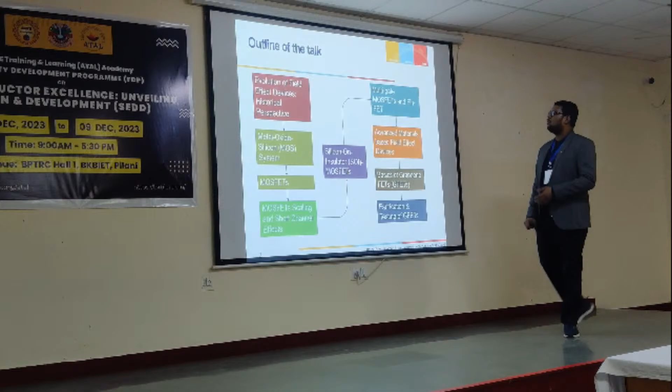So here is the outline of this talk, prepared in this way. First is the brief historical perspective of the evolution of field effect devices, exactly where we are - we will discuss this first.

Then I will discuss the basic things, that is the simple MOS system or metal oxide silicon system, because I think you have enough idea about that, but to continue the whole thing, a few selective portions should be important to discuss at the beginning. So metal oxide system, silicon system, MOS system we will discuss, and in continuation, very briefly, only the important portions of the MOSFET we will discuss here.

Then we will move to our most important portion, that is MOSFET scaling and short channel effects. We will try to see exactly what problems we are facing due to the miniaturization of the device - specifically, the short channel effects. We will discuss that because that is the motivation for researchers to choose some new materials, new devices.

So from here, the turning towards new devices is basically multi-gate MOSFETs, and one of the ultimate solutions is the FinFET. But before going to that, we will discuss one very important topic called the SOI MOSFET, silicon on insulator. That is kind of a linkage between these conventional MOSFETs and the multi-gate devices.

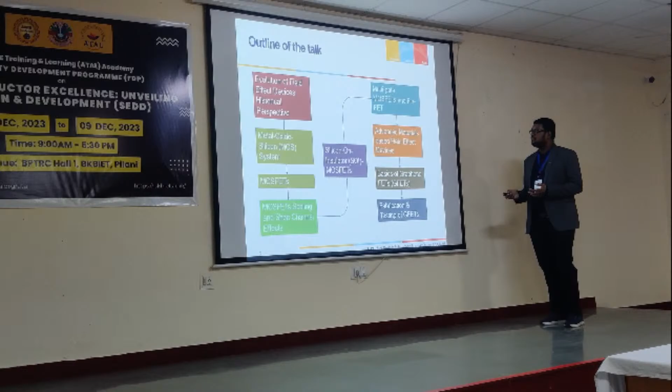In recent times, we are moving towards different advanced materials. We are exploring materials like CNT, carbon nanotubes, and graphene, these are popular advanced materials. People are trying to develop devices using these channel materials like CNT and graphene. They are also working with other advanced materials like chalcogenides, 2D materials, MXenes, black phosphorus, hexagonal boron nitride, so many new materials are being used as channel materials to develop new field effect devices.

But not necessarily all those devices are comparable to conventional silicon technology. These are advanced research areas, and exactly in that domain we are working. I will give you some idea of exactly what we are doing and how we are trying to move towards some new kind of field effect device. Not necessarily will it only be used in mainstream electronics, it can be used for other applications also. So in that way we will move. This is our full outline and flow of talk, and in that way we will proceed.

So we can start discussion on historical perspective.

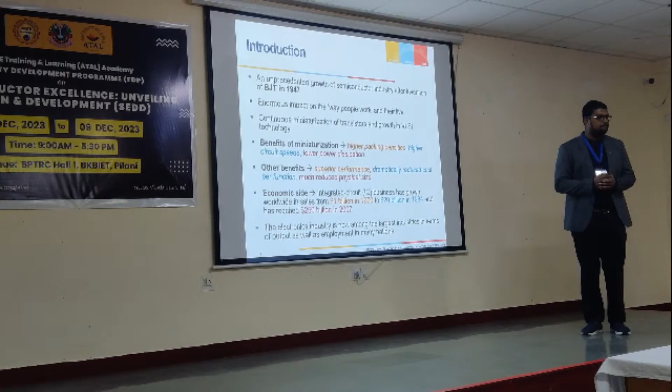1947 is an important time because BJT, the bipolar junction transistor, was invented then. After its invention, there was an unprecedented growth of the semiconductor industry, and this invention created enough impact on the way people work and live. Then device dimensions were miniaturized continuously, and slowly we moved towards VLSI technology, very large scale integration technology.

What were the benefits of this miniaturization and moving towards VLSI? We obtained higher packaging density, higher circuit speeds, and lower power dissipation. These are all very important points from the integrated circuit perspective. Other than this, we have superior performance, dramatically reduced cost per function, and much reduced physical size. If we discuss all these in detail, you will see the huge change that happened in the electronics industry.

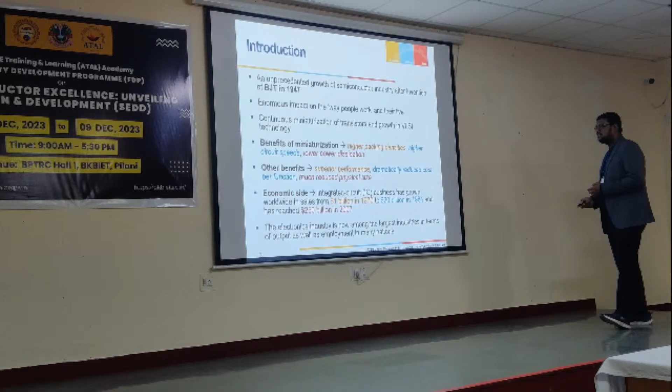If we think about the economic side, the integrated circuits business has grown worldwide in sales from $1 billion in 1970 to $20 billion in 1984, and reached around $250 billion in 2007. That is a huge economic growth in the integrated circuit market. The electronics industry is now among the largest industries in terms of output as well as employment in many nations.

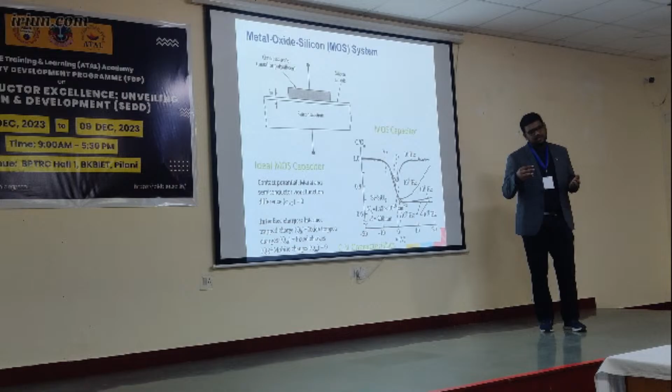The metal semiconductor junction and PN junctions are characterized with IV characteristics, current-voltage characteristics, because if we apply a voltage, current will start to flow through the junction, either in forward bias or reverse bias. But this MOS junction is not similar, because if we apply some voltage between the metal and semiconductor contact, no current will flow, since they are separated by the insulator. So simple IV characteristics is not sufficient to characterize this junction.

The earlier two junctions we can characterize with IV characteristics. In any interview we may be asked to draw the IV characteristics of a PN junction, or of an MS junction. But can we say IV characteristics of an MOS junction? How can we characterize it? We have to measure the capacitance-voltage measurement, the CV plot. Only then can we characterize this junction.

So here I have shown one CV characteristic to characterize this, because this structure is just a capacitive structure. You can assume this - this is the metal part, and this is the silicon substrate, which is also doped.

So these are the two parallel plates, and silicon dioxide is the insulating part inside there. So it's ultimately a capacitive structure, and to characterize it, we have to follow the CV characteristics.

Okay, this is the typical CV characteristics. I am not going to discuss that.

We can just think, when we will discuss the operation of this MOS capacitor or MOS junction under different voltages, because that will be considered as the field effect. So we will consider this MOS junction as the ideal junction.

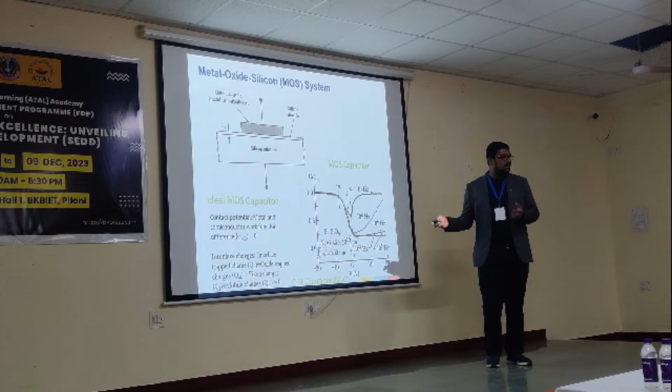What is the difference between ideal and non-ideal junction? When we consider this MOS junction or MOS capacitor as ideal, we will consider the contact potential. That means the work function difference between this metal and this semiconductor will be 0. There is no contact potential, that means no work function difference. That is the ideal situation. We will just assume it, and later we will just ignore it.

And the second assumption is the interface charges. Interface means the silicon dioxide interface. That particular interface has no interface charges. Really, we know there are 4 different types of charges: interface trap charges, oxide trap charges, fixed oxide charges, mobile charges, but we'll consider them 0 initially. And with these two assumptions, we have the ideal MOS capacitor.

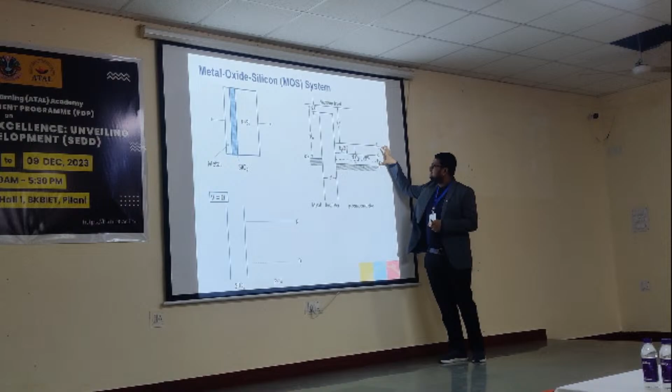Now, under these situations, what you can see is this semiconductor side, conduction band, valence band, they are flat. So we can say these are the flat band conditions, and under these situations, if we try to see the electron and hole concentrations of the semiconductor side, they can be represented with this straight line.

So suppose this is our... okay, sorry. Yeah, that's fine. So now, this is the typical energy band diagram.

So now here I'm just trying to show when the voltage is 0, that means the voltage between metal and semiconductor is exactly equal to 0. At that condition, if the MOS junction is ideal, the hole and electron concentration are constant from this interface towards the bulk region. Okay, that simple thing we have considered.

Why have we considered the hole as the top? Because this is the p-type substrate and Fermi level is close to the valence band. So holes are the majority carriers and electrons are the minority carriers.

Well, now we are applying the voltage between these two terminals. So V equal to 0 should not be applied here. So V less than 0, V greater than 0, V much greater than 0 - these three conditions we will see.

Here is the typical energy band diagram and here is the electron and hole concentration variations shown simultaneously. So here these are the accumulation conditions. What is accumulation? If we can apply a voltage which is less than 0, that means a negative voltage, applied at the metal side with respect to this semiconductor.

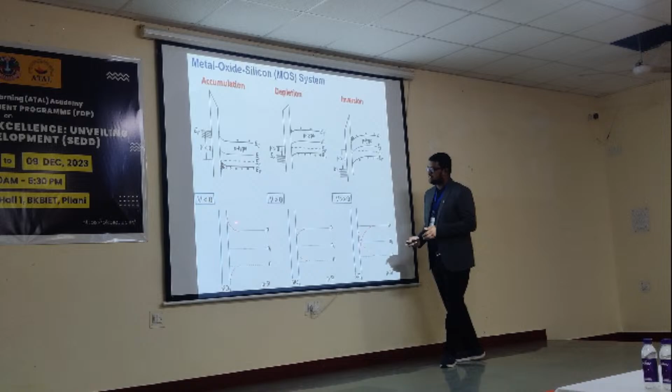So application of this negative voltage to the metal - what you can see is that hole concentration near this interface will increase. At the same time, the electron concentration will decrease in the same order. That happens due to the polarity of the charges, because we are applying negative charges, so negative charges will be here. To compensate those negative charges, some positive charge will appear at this interface side. That's why this situation is happening.

But the most important thing is that when we are applying this voltage, no current is actually flowing, because no carrier is flowing, since this portion is an insulator and through an insulator no carrier can flow. What happens is only the interface region hole concentration is increased, and at the same time the electron concentration is decreased. So that situation says that Np equal to Ni square, that is the mass action law, is still valid after application of the voltage. So the equilibrium condition is maintained here after application of voltage, that is clearly observed here.

Here we see that hole concentration is increased at the interface region. This is called the accumulation of majority carriers, or accumulation of holes.

Now if we apply the opposite polarity, that means positive voltage at the metal with respect to the semiconductor, the hole concentration will show the opposite situation—it will try to decrease, and simultaneously the electron concentration will try to increase.

Again, Np equal to Ni square, the mass action law, will be maintained, because equilibrium is still maintained after application of external voltage. That is a very interesting thing for this MOS junction.

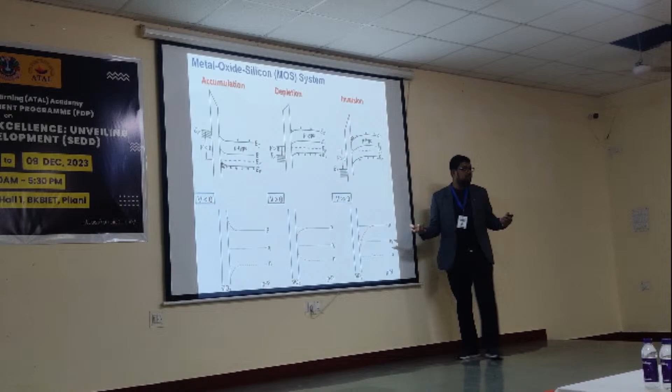It completely depends on the amplitude of this potential. If the potential is increased further, the hole concentration can reach exactly the intrinsic level, and electron concentration will simultaneously reach the intrinsic level, because Np equal to Ni square is always maintained. That situation may arise, and if we increase this voltage further,

then it can cross them. And if the voltage is sufficiently high, the electron concentration, which is the minority carrier, becomes exactly equal to the hole concentration obtained from the doping. The hole concentration is exactly decreased, and Np equal to Ni square is still maintained here.

This situation is called inversion, and the earlier situation is considered depletion. So inversion is the particular condition when the hole concentration equals the electron concentration.

We will say the electron concentration at the surface exactly equals the doping level of the semiconductor—then we can say strong inversion has started. Before that we have weak inversion, and earlier we have depletion.

In that way we can discuss these operations, but I think you already know these things, so no much detailed discussion will be required because our objective is slightly different, so I'm skipping this.

So here is the brief on this MOS junction with their charge distribution, field distribution, and potential distribution. Quickly we can discuss it.

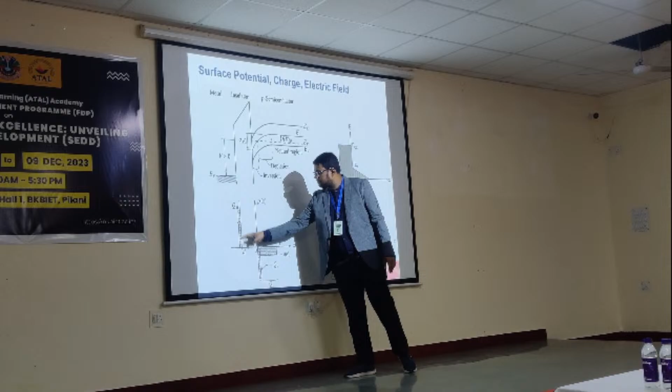Suppose we are at the edge of strong inversion, that is the threshold voltage point. At that point, since positive voltage has been applied, we show positive charges, and at the interface side we have negative charges.

What are the negative charges? We have QD, the depletion charge, and Qn or Qi, the inversion charges. These are the two types of negative charges, and they actually balance the positive charge we get at the metal side due to the applied positive voltage.

If we see the field distribution, it looks like this, because the voltage applied to this MOS junction is distributed among the insulator and the depletion region of the P-type silicon. The potential considered across this oxide is responsible for some electric field.

The electric field on the oxide side is represented as EOX, and this is the electric field in the semiconductor side, which is maximum exactly at the interface and gradually decreases, becoming zero at the edge of the depletion region, because at the depletion edge the neutral region starts, so there must not be any electric field.

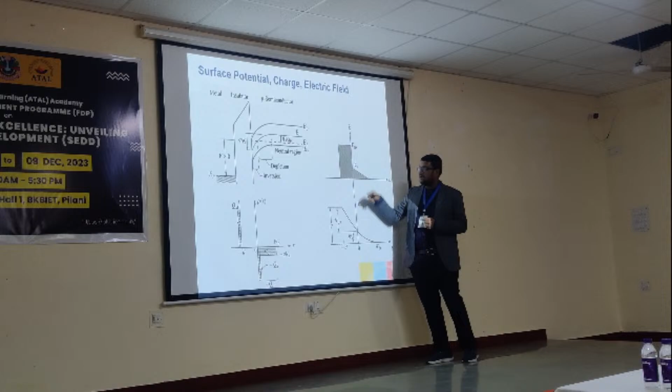One interesting thing: ES and EOX show a 3 times difference, due to the dielectric constant difference between silicon dioxide and silicon. In silicon the dielectric constant is 11.9, and in silicon dioxide it is only 3.9—so there is a 3 times difference. That's why the electric field shows here 3 times: 1, 2, 3. In that way we can see the electric field difference.

These potential distributions can clearly be represented by solving the Poisson equation, but here you can see the potential drop across the oxide, and this is the drop across the semiconductor. So the voltage we apply is separated and drops separately across the insulator as well as the semiconductor. This is the field distribution of the field effect device.

This is a simple concept that always remains valid for any field effect device—the accumulation, depletion and inversion, the threshold voltage conditions, and the field distribution, charge distribution, and potential distribution configurations will never change.

Now we can take the real MOS junction or non-ideal MOS junction. You may remember that initially I mentioned the ideal MOS junction, but here this is the real or non-ideal MOS junction. So what do we have to introduce? We have to introduce the concept of flat band voltage.

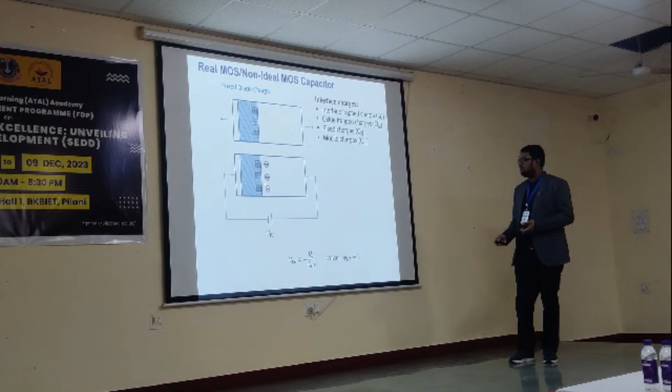If there is some positive charge, there must be some negative charge that exists. They will create some negative charge here, and if we apply positive voltage here, that will create some positive charges. Applying negative voltage to the metal with respect to semiconductor will create some positive charge which will neutralize this negative charge in the semiconductor. So that is considered one part of the flat band voltage, represented as minus QF by COX.

Similarly, we can introduce the contact potential, that is the metal and semiconductor work function difference. Since the ideal situation is never maintained for any practical case, we have to consider this metal-semiconductor work function difference here. So their combination represents the flat band voltage.

In that way, we can finally represent the threshold voltage expression for the N-channel device and the threshold voltage expression for the P-channel device. N-channel device for P-type substrate, P-channel device for N-type substrate. Okay, so these are again the basic concepts we have used here.

Now we will move to our next topic, a brief discussion on MOSFET. If we look at the background history of MOSFETs, as I mentioned, it was invented in 1960 and matured around 1970. Then it started being used in integrated circuits.

If we look at the history from 1970 to 2020, there is a gradual miniaturization of the gate length or channel length. Gate length is the effective distance between source and drain, the feature size of the MOSFET, which gradually decreases as the year increases from 1970 to 2020. You know Moore's law - depending on Moore's law, it was followed completely, and around 2000 you can see the gate length is around 100 nanometers.

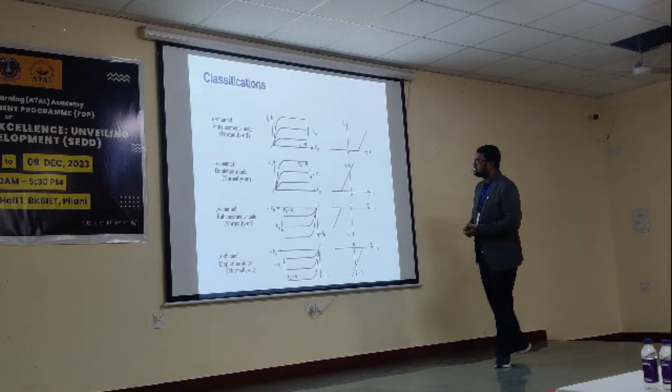Enhancement, you know, is the normally off device. Depletion is called the normally on device. This concept is important because in advanced devices, sometimes we see the field effect device is normally on - that means no voltage is applied and the device is on. You apply a certain voltage, called the threshold voltage, when the device turns off. That is one condition. Sometimes the device is normally off, but you apply some voltage and then the device becomes on. That is what we normally know for the MOSFET case, which is called the enhancement type.

So we'll discuss the enhancement MOSFET here. We can also discuss the surface channel device and the buried channel device. I will not extend this discussion here.

So I can come to the basic characteristics of MOSFETs. This is the typical structure. I will show you that all three types of junctions exist within this MOSFET. First, the MOS junction, what we have discussed, is the heart of this device, metal oxide semiconductor.

We have the source and drain. They are highly doped regions, this is the N plus source, this is the N plus drain. They are creating some PN junctions. This N plus source with the P type substrate forms a PN junction, and this N plus drain with the P type substrate is another PN junction. So we have the MOS junction and the PN junction.

Other than that, we also have the metal semiconductor junction. If this metal portion creates a junction with the source, that is an MS junction, and there is another MS junction on the drain side. But for this operation's perspective, we need these MS junctions to be ohmic in nature. They should not be significant here. If we see the device structure, they are identical on both sides.

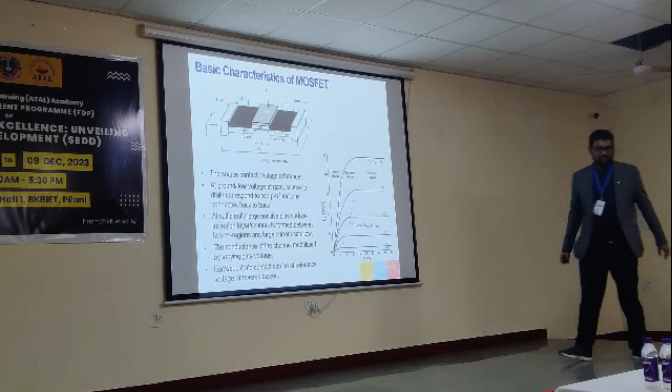Yes, of course. So sir, I have a question. It is like there is a structure on the side. There is an oxide layer at both the ends.

Oxide layer, yeah, this portion. So why is it so? For isolation. Because this is only a single device. Because immediately after that there will be another device, so you are using a common substrate sometimes.

So you are fabricating one device, but this is not the only device. There will be millions of devices. But they have been separated by some separations. Another oxide layer is required to separate it from another device. Where separation is required, oxide is always used.

Different oxide, but these are not the grown oxide, they are epitaxial growth. That means this oxide is created by thermal oxidation, but this other oxide is epitaxial growth using the MOCVD method. So these are used for separations.

So now this is our typical characteristics. Now let's see the operations. I will not discuss much because these are common things. So these are the linear operations, nonlinear operations, and saturation operations. We can see the channel conditions where the channel is almost continuous because the condition that VGS minus VT is much greater than VDS is maintained, so this falls in the deep triode region or the linear region.

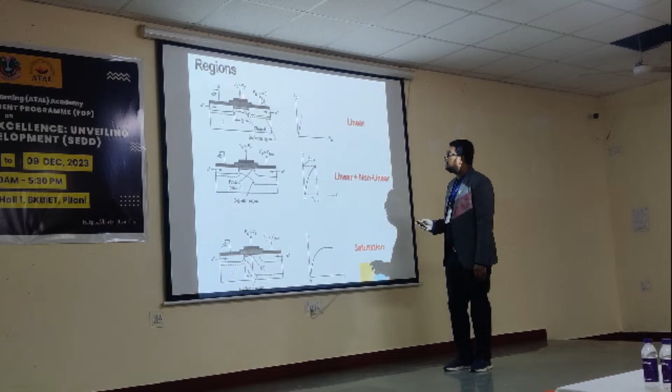We have the continuous field and continuous channel. So our channel behaves like a constant resistance, it's a linear resistance almost, and we are getting the linear behavior.

If we consider the linear and nonlinear combinations, we can see that due to the significantly high VDS voltage, the channel is reduced near the drain end. That particular condition is called the pinch-off condition, where the channel is exactly zero at the drain end, and at that point our saturation starts. The effective channel length is now modulated here, and that is called the saturation condition.

Sometimes confusion comes as to why, even though we are increasing the VDS voltage further and the channel is reduced, we are getting constant current. But I will not discuss this whole thing, I think you already know these operations, so we can move to the next important thing.

So these are the MOSFET equations I have summarized here. I don't want to discuss this in detail, I just want to say two important things. These are the popular MOSFET equations, equation number 1 and equation number 2 are the linear and saturation region equations. Everybody knows this, and all these equations we are using here are based on one approximation called the gradual channel approximation.

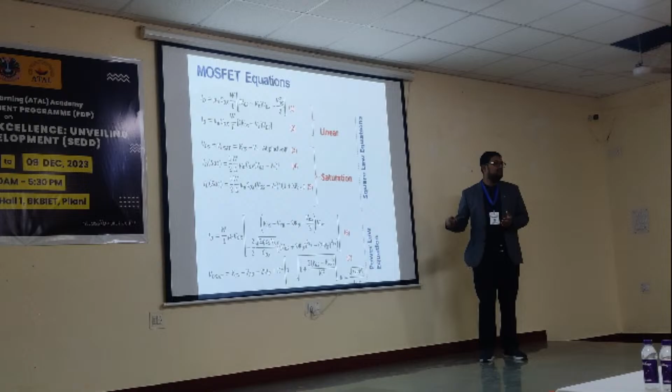If it's a short channel device, you can think it's better to use the power law equations from the device perspective. But I'll never suggest circuit designers choose these equations, they'll face problems working with such lengthy equations, and it will take lots of computational time.

Whenever we use software like ADS or other tools, we have to put in values already given in the data sheet. So based on that, when moving to theoretical or technical calculations and wanting to match results, I think the square law equations are more suitable, not just more suitable, this is the only acceptable option.

We show this thing from the modeling perspective, because when we study a device in depth, we have to know what approximations we have taken, and with which parameters neglected we are obtaining these equations. But if you move towards advanced devices, you face lots of complex modeling, and this is one of the hints that if the device becomes smaller, the situation becomes complicated. Here we are still using classical physics only; we have not introduced any quantum mechanical concepts. If you consider a 3 nanometer or 5 nanometer device, your normal concepts will not be valid there. You have to use volume inversion and so many other issues, so these equations will be completely invalid there. If anyone wants to use these classical physics based equations, that's completely wrong.

That concept is completely changed there. We can move to the next topic.

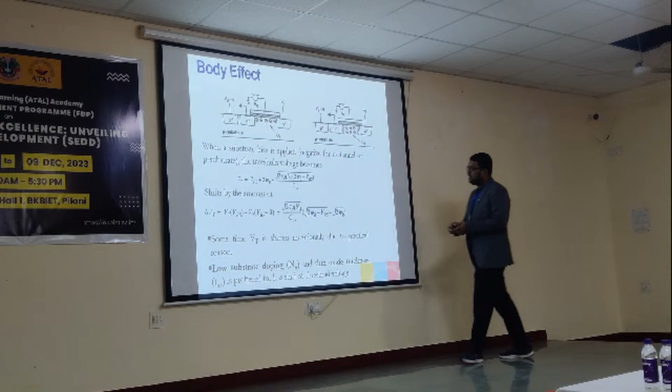Now think of the scenario if we do not have a top gate — the top gate does not exactly exist, and we only consider this back gate voltage to create the channel and perform the operations of the field effect device. That's why I discussed this; at the end of this discussion, when we consider 2D based field effect devices, we will see all the devices are only back gate devices, which are much easier to fabricate.

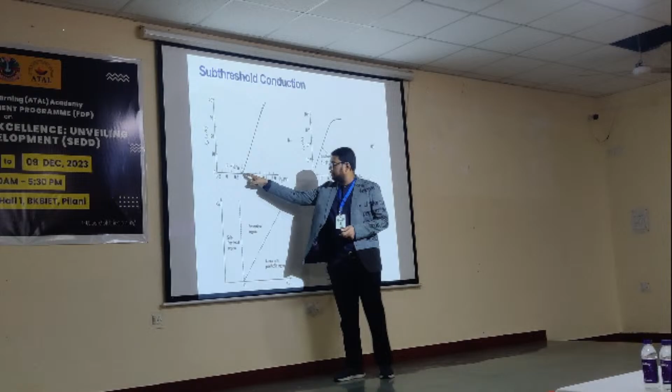Now the one important point, that is subthreshold conduction. Without discussing this subthreshold part, we should not compare device performance for short channel devices. So here is our current-voltage behavior: this current is ID and this voltage is VG. If we consider drain current versus VG, this is almost a linear increment, or further it shows non-linearity — that's the situation when we represent current versus voltage in linear scale. When we represent it in log scale, we can see below this threshold voltage, in the linear scale, we were not able to see any current.

But when we represent it in log scale, we can see there is a rapid transition or decrement of current, which was considered zero current here, but that is not really zero — it's a finite current, but the value is small. That current is around 10 to the power minus 6, minus 8, minus 10, indicating we are in the micro or nano ampere range of current here. So that is called the subthreshold part, below threshold, where the current is rapidly decreasing.

This part is very important, because when the device is off, most of the time during operations it remains off. In the off condition below threshold voltage, if VDD is already connected, the current should be as low as possible for low power consumption. That is the most important thing. So this slope should be as steep as possible, meaning when we go below threshold, the current immediately decreases.

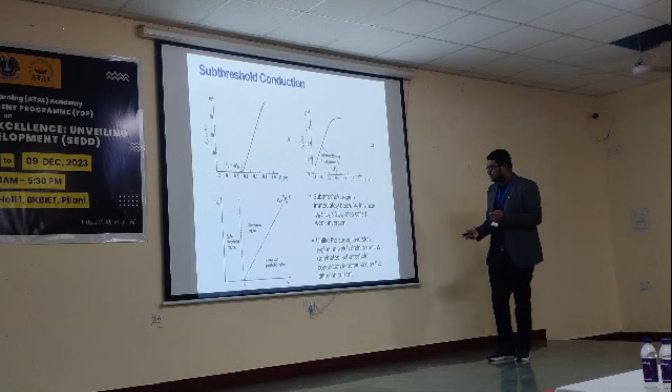That is our subthreshold slope, which indicates the change of VG with 1 decade change of ID. Most of the time we consider the surface potential below twice psi B, and psi B is considered as the region to calculate the subthreshold current, which is called the weak inversion region.

Now here you can see the different regions. We have the VDS versus VGS representation, with the linear and parabolic region, the saturation region, and below threshold we have the subthreshold region.

We have derived the equations for the linear region and the drain current equations for the saturation region. We can also derive the equations for the subthreshold region, but in the subthreshold region our simple drift mechanism will not be valid. We have to consider the diffusion mechanism.

However, I am not going into that derivation. I am just considering the equations. This equation 2 is considered as the drain current equation for the subthreshold region, which is sometimes almost independent of the drain to source voltage. It only depends on the surface potential.

Considering equation 2 and 3, we can get an interesting representation of the subthreshold slope, also called the subthreshold swing, given as ln 10, kT by q, times COX plus CD by COX. I think you are familiar with these expressions. This is called the subthreshold slope, and for different MOSFETs, this equation is used to represent their subthreshold region properties, showing how good the subthreshold behavior is.

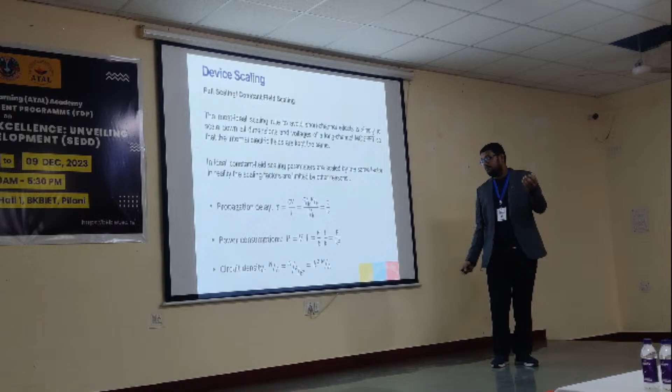So people choose to scale down the device so that their performance will improve, and more transistors can be implemented on the same IC. These are the advantages, but at the same time lots of disadvantages appear.

We can see the voltage related issue, if we consider constant field scaling, it is not maintained ideally for practical situations. Here I have given some statistics to explain how real scaling rules are followed year by year.

I have given here the statistics of four different years: 1974, 1984, 1994 and 2004. The technologies are basically 5 micron in 1974, 1 micron in 1984, 0.35 micron, that is 350 nanometer, in 1994, and 90 nanometer in 2004. What is the situation for VDD? VDD is 10 volt, 5 volt, 3.5 volt and 1 volt.

If one tries to check whether constant field scaling is maintained or not, they can check from here. Suppose over these 10 years, the technology decreases 5 times, but the voltage decreases only 2 times. So this is not constant field scaling.

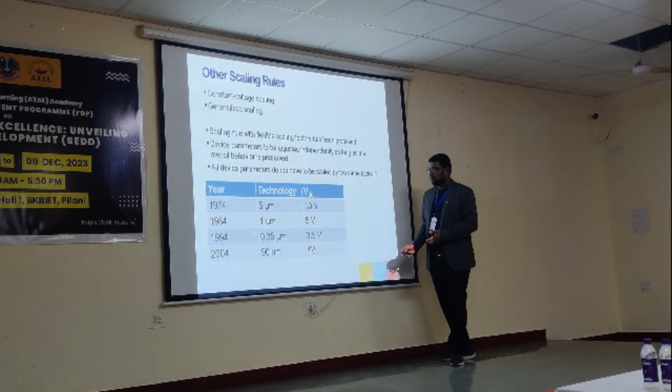If we consider the next 10 years, 1 micron to 0.35 micron, divide 1 micron by 0.35 micron, and divide 5 volt by 3.5 volt. Again, they are not constant field scaling.

If we consider 1994 to 2004, 350 nanometer divided by 90 nanometer, and 3.5 volt divided by 1 volt, they are close to constant field scaling.

So sometimes when required, people follow constant field scaling, and sometimes they adjust using their required voltage and dimensions. So ultimately, generalized scaling or constant voltage scaling are much more popular compared to constant field scaling. These are the whole things about the scaling rules.

Now we will move to our next topic, the effect of channel length reduction. What happens if we reduce the channel length? If we reduce the channel length, the most important thing is that we lose our gate control. You can explain this with different perspectives, but ultimately gate control is lost when we consider the high electric field in a short channel device.

Even with the best scaling rule, as the channel length is reduced, departures from long channel behavior are unavoidable. The long channel behavior, which we consider the ideal behavior for MOSFETs, departs due to two-dimensional potential distributions or high electric field in the channel region.

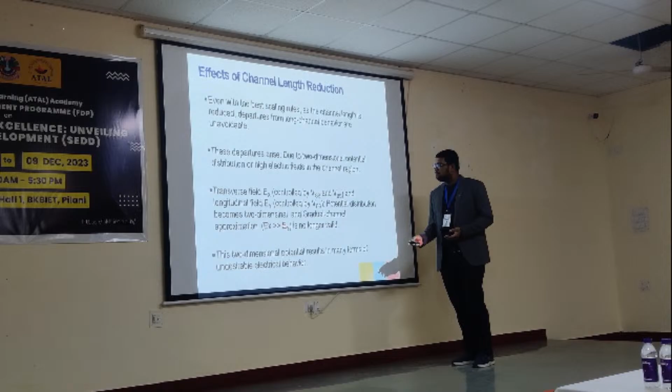But when the gate dimension, that is the gate length, is decreased, the source and drain become closer. So even with a small VDS value, the electric field will be significantly high in the X direction, meaning the longitudinal electric field becomes significant. This condition is no longer valid, EX becomes sufficiently high compared to EY, and we lose gate control over the channel. So when we try to stop the device, it will not stop.

Due to the VDS voltage, there will be some flow of current. This two-dimensional potential results in many forms of undesirable electrical behaviors. What are these undesirable electrical behaviors? I have listed here the most popular ones, and all together they are called short channel effects.

First is velocity saturation, which you will not be able to avoid. Second, charge sharing from source and drain, and threshold voltage roll-off. Then punch through and drain induced barrier lowering, normally known as DIBL. Multiplication and oxide reliability issues are called hot carrier effects. There are parasitic effects of impact ionization at high field, and finally oxide breakdown.

If you search further, you may find two or three more points, but they somewhere flow together. So ultimately, all these short channel effects are due to the electric field EY not being sufficiently high as compared to EX. That's why we get all these situations. We will discuss these short channel effects briefly, and then see how we can overcome them.

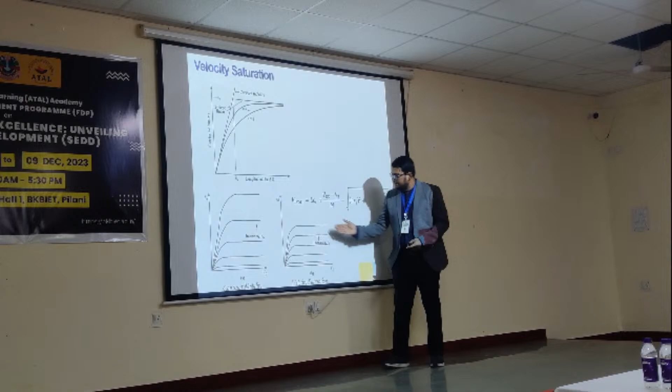What is the effect of that? Suppose this is the current-voltage behavior for a normal MOSFET where velocity saturation is not observed. But if velocity saturation is observed, you'd expect the current to show this type of behavior, but before reaching actual saturation, the current-voltage behavior shows another type of saturation. For the same device, the electric field is much higher here, and velocity saturation applies. So the normal behavior is suppressed, and you get saturation before the actual saturation. This saturation is not the saturation we know about from normal MOSFET performance; this saturation is due to velocity saturation.

So the whole performance of the device becomes changed due to the velocity saturation effect, and that happens due to the short gate length or short channel length. That is the first and most important short channel effect we can consider here.

This is the expression I have written here to represent VD sat if we consider velocity saturation. Otherwise, what we know, VD sat value, that is VGS minus VT for the normal case. But if we consider VD sat with velocity saturation, we can use this function.

We can move to the next short channel effect: charge sharing from source and drain. Just think, this is your MOSFET, it's a short channel device. If you consider the same structure for a long channel device, then this charge sharing effect will not be significant. What is charge sharing?

This is the channel region, and the depletion region is created due to the VGS voltage, gate to source voltage. Exactly at this interface region we have a 1 or 2 nanometer thin inversion charge. This portion is actually the depletion charge created due to the gate to source voltage. But here we have another depletion region which is created due to this N plus P junction. This is the source end.

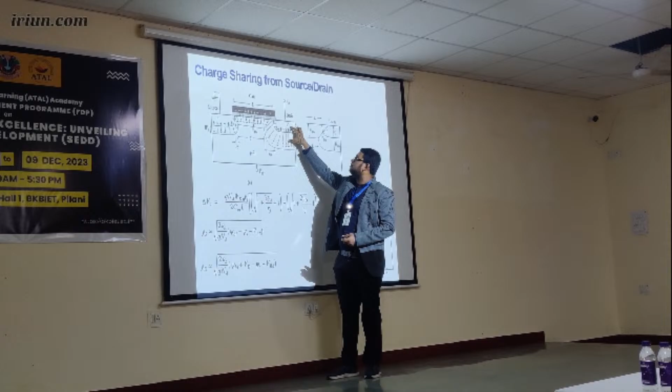But for this short channel device, this charge is not only a contribution of gate to source voltage, there's contribution of drain to source voltage from this drain junction, and some contribution from the source also. This contribution of charge cannot be ignored here. If the device is too long, we can ignore this type of overlap and say that most of the charge created in the channel region is only due to the gate to source voltage. That is charge sharing.

If we consider this charge sharing effect for this short channel device, we can see a deviation in the threshold voltage expression. So this del Vt is the deviation due to the threshold voltage expression.

Why is this happening? This is mostly happening due to the charge sharing effect, and these calculations we can do by using this formula. Behind it we have lots of calculations, derivations, and modeling, but this type of threshold voltage roll-off or degradation we can see in case of charge sharing effect.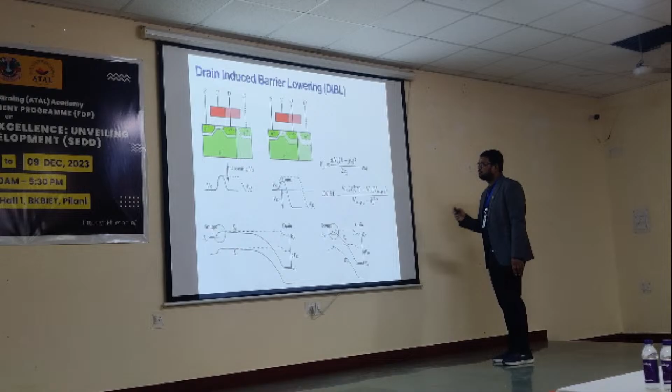So what happens for that? If you are applying your gate voltage below threshold voltage and you are applying a high VDS voltage, your device will start to conduct. That is not expected, because you are not applying the VGS voltage above threshold voltage. So you are expecting the device will be off, but you have applied some VDS voltage and the device starts to conduct. So there is some finite drain current at that point. That is the drain induced barrier lowering. There are some numerical expressions to represent the DIBL, and also an expression to represent the punch through condition. So that is our third short channel effect.

Fourth short channel effect is the multiplication and oxide reliability, or hot carrier effects. If we consider the device operation, suppose the source and drain separation is very small because we have short channel devices, so electrons are moving from source to drain during operation. Now at the drain end, we know there is the highest electric field. Due to this highest electric field, the carriers achieve a high kinetic energy. We know half mv square is the energy, and this kinetic energy is too high, such that it can cross the barrier between this semiconductor and the silicon dioxide.

The barrier is normally called the offset. This offset is around 3.1 electron volts. That is one of the important advantages of this silicon dioxide system. This offset is too high. That is the difference of conduction bands, conduction band of silicon and conduction band of silicon dioxide. That offset is around 3.1 electron volts. That is too high. That's why when the electrons are flowing through the surface, they are not easily entering the oxide because of this 3.1 electron volt offset value.

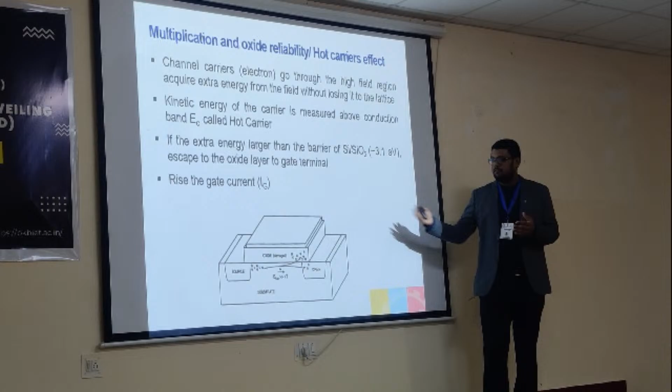But when these channels are very short, the electric field is very high, and the carriers achieve very high kinetic energy, so high that they can overcome this 3.1 electron volt offset and reach the oxide part. And when the electrons enter into this oxide, it's not a reversible process. They do not revert back to the channel again. They still stay here, and when they stay here, the oxide quality will be degraded. Oxide will become poor, and if this situation continues, the oxide performance will become poor, and after some time it will break down.

So oxide breakdown will be possible. This energized carrier, due to the high electric field that happens due to short channel effects, is called the hot carrier effect, because they are highly energized carriers. That's why sometimes this is called hot carriers.

So this is the fourth effect, and this is our fifth short channel effect, called the parasitic effect of impact ionization. You can see what happens here: if the electric field is very high, that means drain and source are very close, so in this portion where the electric field is maximum near the drain end, impact ionization can happen. Due to this phenomena, electron hole pairs are generated. If electron hole pairs are generated, due to the bias, electrons will move here, but the holes mostly move towards the bulk side.

When the holes are moving towards the bulk side, they are sunk by this bulk terminal towards the source. That is the natural process.

Now, if this impact ionization is significant, it can show some parasitic effect. What is the parasitic effect? You can think of MOSFETs with N plus source and drain with P-type substrate acting similar to an NPN transistor. But the NPN transistor will never be active unless this impact ionization related phenomena happen. How will this be active? If you can believe there is a bipolar junction transistor or NPN transistor here, and impact ionization happens,

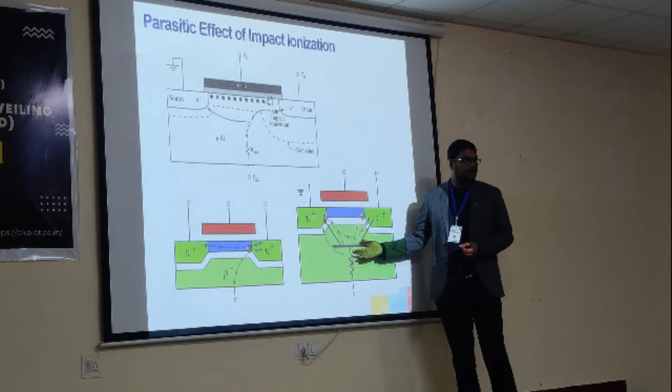That current will multiply with this resistance and show some voltage drop. If a drop is created here, this is our emitter terminal and this is our base terminal, so the base-emitter voltage will become significantly high. We know that if the base-emitter voltage is more than 0.6 or 0.7 volts for a silicon BJT, then this BJT will be active, it will be on. If this is on, current can flow through this bulk also. It's not only dependent on the channel region, it can start to flow through this bulk.

So that is the parasitic effect, and it's not actually required. It happens due to this impact ionization and high field situation. That is one short channel effect.

Finally, the oxide breakdown. Why does oxide breakdown occur? We are losing our gate control over the channel because of the short channel of the device. A small VDS is sufficient to increase the electric field EY. So what is the way to increase gate control over it? The normal and easy way is to decrease the oxide thickness. If the oxide thickness is decreased, we get higher capacitance and more capacitive coupling.

That's why the oxide thickness has been decreased from the starting days. Now the oxide thickness is very, very small. But what is the problem? Oxide thickness reduction is not the only way to overcome these short channel effects. If we decrease this oxide thickness, there is the possibility of oxide breakdown. Oxide breakdown can happen immediately, or it can take a lot of time, and after some time, the oxide breakdown becomes possible.

There is some procedure to test that time dependent oxide breakdown, or TDDB. So these are the ultimate problems if we decrease the oxide thickness to overcome the short channel effects. So these are the whole things related to short channel effects due to the miniaturization of device dimensions. Now we will try to find some alternate solutions and move to some new devices.

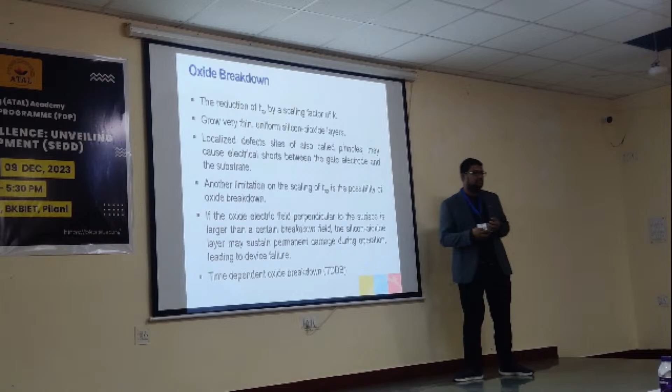There are lots of alternate solutions to overcome these different situations, but really, if you want to overcome one problem by choosing one solution, it will create another problem. There is no such ultimate solution. The ultimate solution is to change the device. So here I will discuss silicon-on-insulator, SOI MOSFET, because I believe this device is the linkage between the conventional MOSFET and the advanced MOSFET.

This particular type of MOSFET never got enough commercial success, but it gives a better idea of how we can move towards the double gate device - how we can increase one gate, another gate, and increase the gate control over the channel. That's why I believe this is the link device. When we were in our master's degree, this SOI device was so popular and lots of research articles were there. We tried to study it, but slowly those discussions stopped and people moved towards multi-gate devices. But really, that is an interesting and important concept. That's why we are now moving towards the FinFET today.

It was developed in the early 1980s. The concept was first developed by these scientists, and we have lots of study materials from Professor J.P. Colinge on this SOI MOSFET. Most of this material we have adapted from his valuable books and research articles. This SOI adoption was first taken for high performance computing applications, and it was sometimes used in military applications and some power applications. It was invented targeting specific applications, but it became popular.

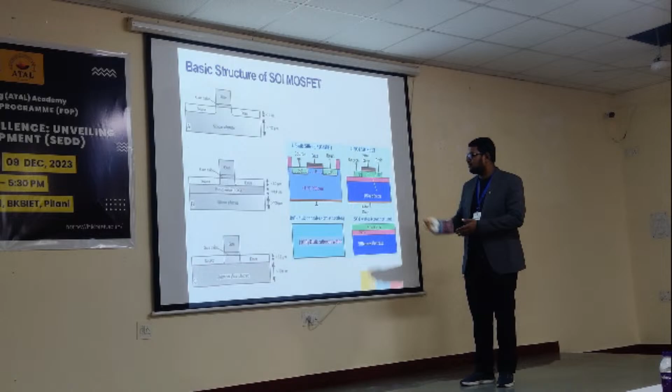But I have added this SOI MOSFET here as a linkage between single gate devices and multi-gate devices, not for these advantages. So let's look at the structure here. The structure of this SOI MOSFET is very simple - it's similar to a MOSFET. This is our simple conventional MOSFET with source, drain, substrate, and gate oxide.

But here, in the same structure, we have a buried oxide layer. This oxide is nothing but silicon dioxide, but the thickness of this oxide is much more than the top gate oxide thickness. So this is the only change. You have the silicon substrate, the buried oxide layer which is a thicker oxide layer, and then you have a silicon body - this is called the silicon body, and its thickness is called TSI. Some portion of this silicon body is doped for the source and doped for the drain, and the rest of the portion is considered the neutral portion where the channel will be created due to the gate voltage, VGS.

This structure can also be implemented over a quartz or glass substrate, replacing this buried oxide layer, but this is the more popular structure.

If we consider the fabrication steps for this SOI device as compared to the bulk silicon MOSFET - for bulk silicon MOSFET, fabrication starts from a bulk silicon wafer; you have only a silicon wafer and you start fabricating from there. But for the SOI device, we initially consider an SOI wafer: silicon, BOX layer, and SOI layer. This is the initial wafer structure. If you want to purchase an SOI wafer from the market, you can purchase it.

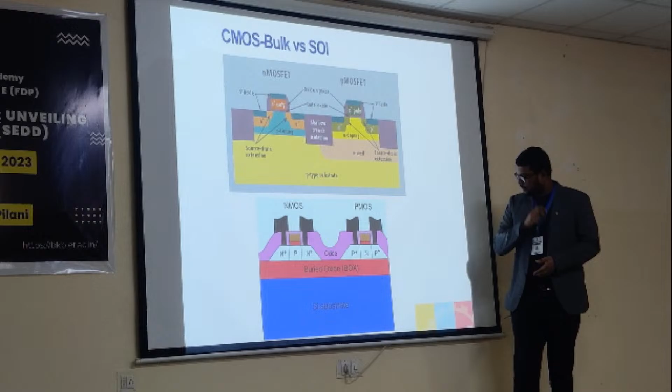Now, what are the advantages? The first and most important advantage is the source and drain capacitance. The junction capacitance is significantly high in conventional MOSFETs. Junction means, let's say this is your drain N plus region and this is your P substrate. There is a huge junction capacitance due to this N plus P junction. We know that a PN junction offers a huge, voltage dependent capacitance. This is the expression of that capacitance. So we have a huge junction capacitance.

But in the SOI device, you can see the drain and source, and immediately after that we have the buried oxide layer. No junction will be formed, and the junction capacitance will be very, very small. This capacitance can be represented with this expression. That is the most important advantage, and that's why the SOI device is much faster than the conventional MOSFET.

Now we will see the types of these SOI devices. Mainly, the SOI MOSFETs can be classified into two parts: one is the partially depleted SOI MOSFET, another is the fully depleted SOI MOSFET. So again, you can see this structure. We have this substrate, buried oxide layer, and this silicon body. This is the whole silicon body, and this is the N plus region. You can believe this is the drain, this is the source, and this is the neutral portion.

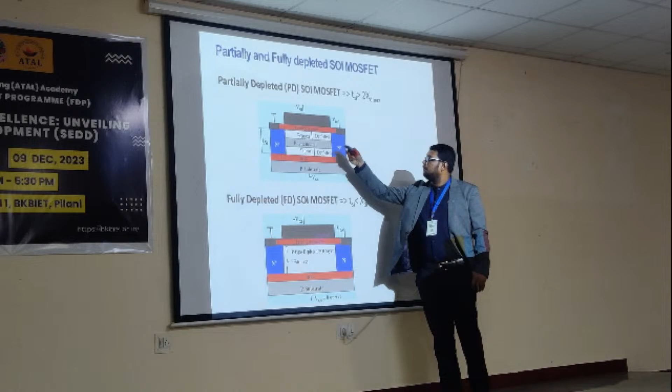Now, front gate oxide we have, and what is the situation for a partially depleted MOSFET? This is the condition: this silicon body thickness is TSI. Now, if this TSI is greater than 2 times XD max, then this device will be considered the partially depleted SOI MOSFET. What is the XD max?

This is the depletion region width for the MOS junction. I have shown that depletion region thickness at the edge of strong inversion - that is the maximum depletion width. If you apply more and more gate voltage, the depletion width will not increase after reaching the maximum edge of strong inversion. So this is the maximum depletion width, and this maximum depletion width can be extended from the top gate side, or extended from the bottom gate side.

But this condition says TSI is much greater than 2 times XD max, which means there will be some neutral region which will not be depleted. That's why in this particular device, there will be some neutral region which will never be depleted no matter what voltage we apply at the gate. So this type of SOI device will be called the partially depleted SOI MOSFET.

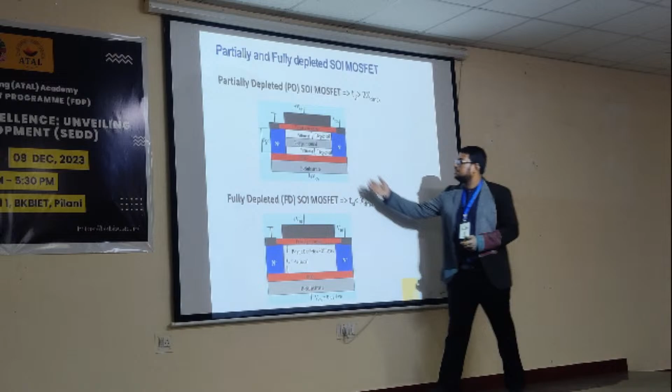The operation is very much similar to the MOSFET, because of this neutral portion. This is called the neutral body, but there is another significant effect influencing this performance, the floating body effect. But we are mostly interested in the fully depleted SOI MOSFET because this is the way towards the multi-gate device.

So this FD-SOI MOSFET is the device which can maintain this condition: TSI, or silicon body thickness, is less than XD max. That means by applying this front gate voltage, you can deplete the whole silicon body. So that is the fully depleted SOI device. This particular device has greater significance in operation; it is far different compared to the conventional MOSFETs.

If we can see the energy band diagram, it would be easy to understand. So here we have this normal MOS structure. We have one gate oxide, and this is the band bending because we know depletion and then inversion happened, that's why this band bending happened, and this is the width of the depletion region, XD max, you can believe.

This is the situation when we have this double gate. This is the front gate and this is the back gate, or nothing but your buried oxide layer for this SOI device. But this is the partially depleted SOI MOSFET, so the depletion region can be extended from the top side, and the depletion region can be extended from the bottom side, but there will be some neutral region where the flat band exists.

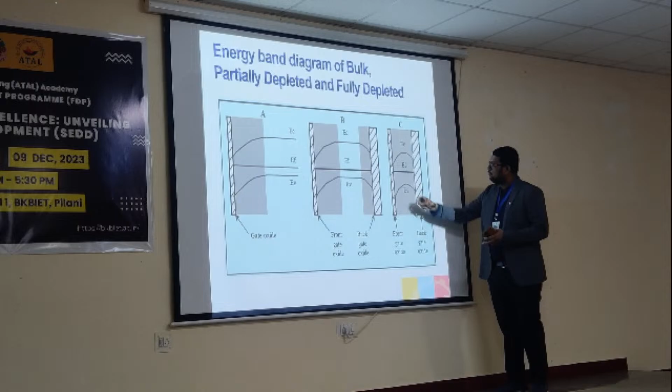But here this is the fully depleted device, so you can think the TSI thickness is much smaller, so these two gates are too close, so only the top gate is enough to deplete the whole neutral body. So from the energy band diagram, this device can be easily understood.

Now the operating regions. We have two gates: one is the top gate, another is the bottom gate. The bottom gate, which we can consider as VG2, if we apply some gate voltage from the bottom side, it can create an electric field in the neutral region.

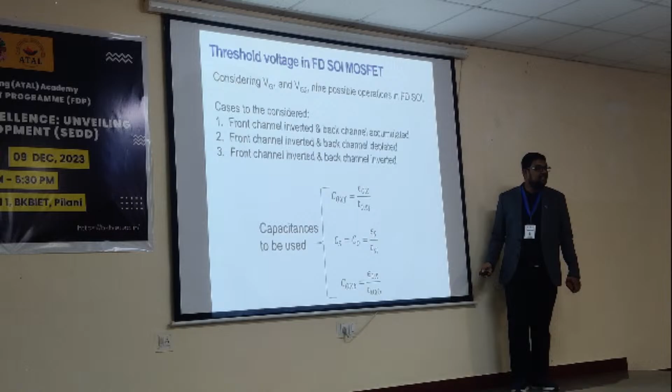So these are the basic operations of FD-SOI. There are lots of advantages, which is why SOI devices became popular, but our objective is to move to the multi-gate device. So I will explain what problems we are facing with the FD-SOI device. The problems are the field lines.

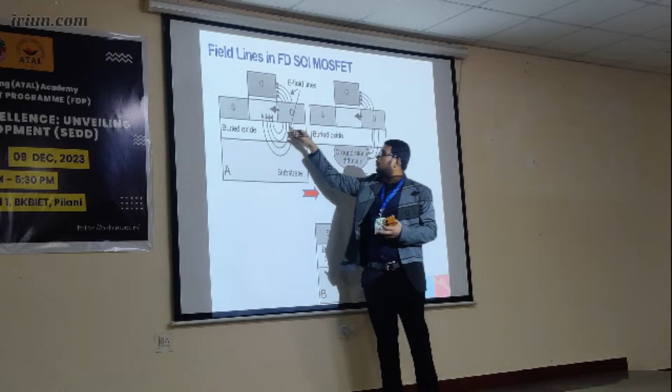To restrict this field line, researchers created a ground plane diffusion -- a doped region so that the field can be restricted by this ground plane. They also created another gate inside this buried oxide. This is actually called silicon on nothing, which was simultaneously invented with the SOI device -- SOI and SON. This is called SON, silicon on nothing. They imagined one gate at this portion, trying to restrict the electric field using this gate terminal, so the channel cannot be influenced by the additional electric field.

This device fabrication is not so easy, because suddenly one gate inside this buried oxide will not support the silicon fabrication technology easily. So one can assume it and simulate easily on TCAD, but this device is really difficult to fabricate. But this is not my intention.

My intention is to show that ultimately we are moving towards double gate by using this SOI device. Anyway, this SOI gives us VG1, VG2, two gates' influence. They show some effect of additional gate voltage. So from here, in conjunction with SOI device, we are moving towards multiple gate technology, and that ultimately helps us to eliminate the short channel effect partially, not fully. So we will move to the next topic.

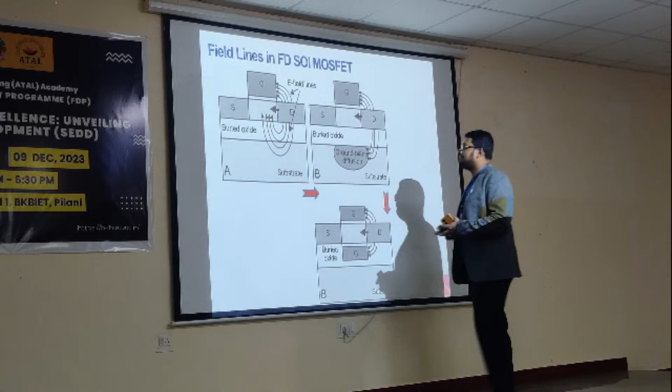Like the electrical field lines flow from drain to gate also. So how will the electrical field flow from drain directly to gate? If field lines move due to any polarity difference, okay, if you have some polarity here and another polarity there, polarity have some difference, there will be some field line. That may influence your operations, that may not influence your operations. It is through the air. Here is a dielectric, okay, here is a dielectric.

The lower the dielectric, of course, field lines can move here. If you have a unit charge, you know that electric field lines will spread up to infinite distance, ideally. So if they are very close, of course, field lines can influence, through air also. Here is a good dielectric. It depends on what's the distance between gate and drain, and what is the medium also.

Yeah, of course, medium is influential. That's why I am saying this buried oxide has a lower dielectric constant than silicon, so field lines will be stronger within this region. In air also that is stronger, because that dielectric constant is minimum, ideal. In vacuum, what we consider, that is only 8.85 into 10 to the minus 14 farad per centimeter. So that is much smaller, it's almost close to the absolute permittivity.

So now the multi-gate MOSFETs and FinFET. Here is the trend again, I have shown here that is published by Gordon Moore. So what was the prediction? That transistors would quadruple every 3 years. Number of transistors per chip would quadruple every 3 years, but really that is not followed because of the short channel effects, what we have discussed till now.

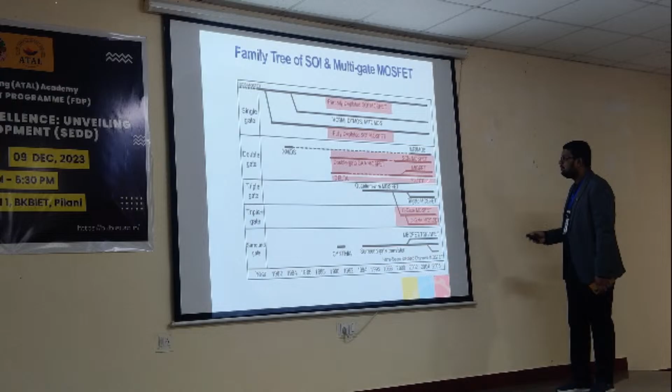After the invention of the concept of double gate and delta gate in 1990, the FinFET is now almost in a matured condition. So you can see that almost three decades are required for a device to become matured.

To get some idea about multi-gate devices, the starting point is the single gate device. Now single gate is not the MOSFET, it's an SOI device. All the multi-gate concepts are based on the SOI substrate, SOI wafer, which is why SOI knowledge is very important. In a single gate device, we have the buried oxide layer, the silicon body, a thin silicon dioxide layer, the top gate, and the gate terminal. This is our single gate device.

Now for the SON device, I've shown earlier that it has less physical significance. This is the MIGFET. You can think of this as the buried oxide layer, this is one gate, this is another gate, and this is the silicon dioxide, and this is the channel layer. These two gates simultaneously control the operations within this channel region.

FinFET is again a lateral gate device. If you can see, this is the oxide region, this is the SiO2 region, and this is the gate. So the connected gate is looking here. It can be considered as a triple gate device, or it can be considered as a double gate device. We will discuss this.

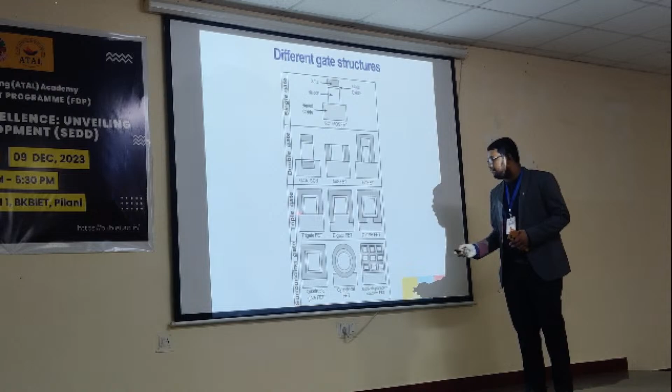We have the quadruple gate, which falls in the surrounding gate family - gates all around, everywhere we have the gate. You can consider the cylindrical gate also, but this is the multi-bridge stack nanowire FET. So you can see these different nanowires, and all these are gate materials. To increase gate control over the channel region, people have increased the number of gates day by day. You can simulate this in TCAD, but these are really difficult to fabricate in practice.

So what is the advantage of multi-gate? Of course, simply, gate control. With a single gate, the gate is not able to control the channel well. Control here means what I discussed regarding the short channel effect.

But suppose, sir, we are using the multi-gate FET - will there be an antenna effect? Antenna effect - meaning excessive current at the gate terminal. Then how do we reduce it? Not clear, please elaborate. Suppose we are using a multi-gate FET, then excessive current will be at the gate terminal, so we can say there will be an antenna effect. So how do we eliminate it? That effect is known as...

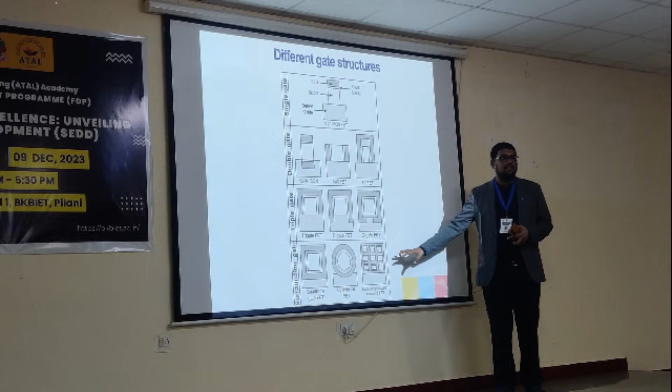Maybe I agree with you. I'm not saying these are the ultimate solutions or ultimate devices that can solve this problem - this is just one way to increase gate control over the channel. Maybe what you're saying is that gate current will be used or something, I'm not sure exactly from which point of view you're saying this. Just think about the whole matter in one direction - the direction is simple: we need the channel to exist, or current to flow between drain and source, only when we want it - when VGS is greater than threshold voltage, current will flow only at that point. This is an example of FinFET, I'll come to the FinFET later.

Okay, so this is the FinFET. Of course, within this all double gate structure, FinFET becomes practical and most attractive. We will discuss that.

So this FinFET fabrication is easier, even much easier than the MOSFET also. That's why this technology became so popular, and now ICs are developed with this material.

So this is not the ultimate solution. Nothing is ultimate. If we can see the short channel effects in FinFET, then that still exists. But it is better than the MOSFET, so in that way we can proceed.

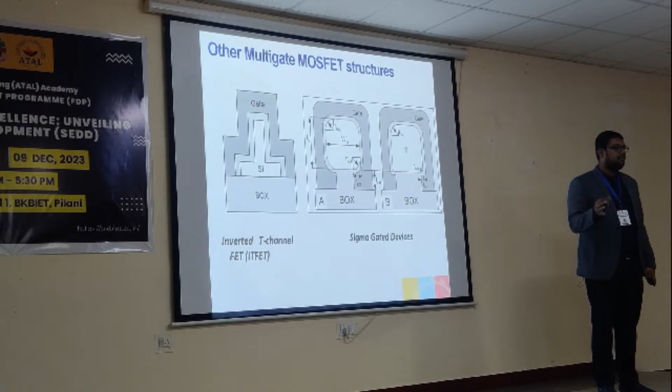So here are some inverted T-channel MOSFETs, and here is a sigma gated device. If you see the research papers, you will see a huge number of multi-gate devices reported. People have worked on them and reported them, but they are far from the practical scenario. They don't actually match what is required.

Just briefly I want to say why multi-gate MOSFETs are actually effective for increasing control over the channel region. That can be explained with multi-gate MOSFET physics. There are a lot of physical derivations, but I have only added this first slide of that. We have considered the three-dimensional Poisson equations to represent the electric field components inside this channel region.

Just think of this as a device having the possibility of multiple gates. Here is your drain, here is your source. A gate can exist at the top side, gate can exist at the bottom side, gate can exist at the right side, left side - everywhere a gate can exist.

Now this is the point. We are applying the Poisson equations here, and Poisson equation says this is a three-dimensional Poisson equation. We have written this, and on the right hand side we are making it equal to Q*N_A by epsilon_Si. Now, this is applicable when this area will be completely depleted, then only we can apply this.

And we know this whole system is starting from the fully depleted SOI device, so this silicon portion must be depleted completely. So easily we can use the Poisson equation within this range.

Now we can represent it in this electric field form. The potential's double derivative is represented in the form of dEx by dx, dEy by dy, dEz by dz. On the right side we are considering this as constant because this is fully depleted. If we consider Q*N_A as the doping of this silicon body, and this is directly constant, all these are constant, so the right side we consider as constant.

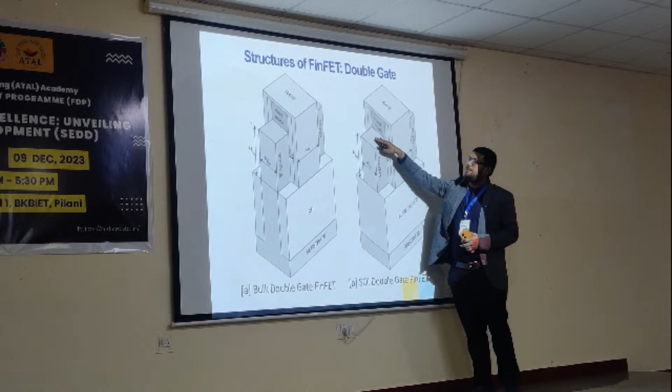You can see this double gate device because FinFETs are most popular in double gate configuration. How is the double gate configured? By adding this hard mask portion. This is some different type of dielectric medium, so that this gate effect will not appear here. They try to restrict this gate effect over this region. They think these lateral two gates are enough to control this channel within this region.

This top gate effect should not be here because there is lots of chaos that comes, because that is called the corner effect. If these two gates simultaneously work, this region will be inverted much faster than this region, because this gate and this gate within this corner are applied more, and the inversion will be created in this corner first. So before opening the channel due to the inversion, this portion becomes open first. So this corner effect is not a desirable thing. That's a significant problem for the multi-gate device.

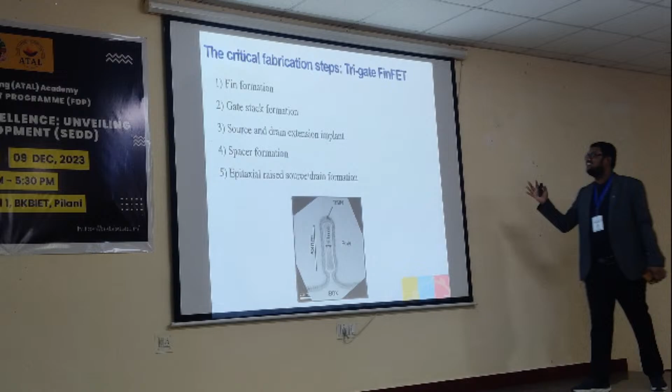That's why in the FinFET, they restricted this top gate and only use the lateral gates. So channel will be created in this area, channel will be created in this area. Here I have not added detailed fabrication steps, only a few steps, because this is not the position for showing the derivations, physics and calculations. Just to see that FinFET can so easily be fabricated. That's why it has become so popular in recent years.

So this is one typical FESEM image for a fabricated FinFET, which has 11 nanometer channel length. Now for the FinFET, what is the channel length? This is the channel length. Here is one gate, there will be another gate, but this 11 nanometer is the channel length, while the fin height is 58 nanometer. Why is this called fin? Because this is ultimately a finger. Finger in brief is called fin. This is called the fin height, this is called the fin width.

So these are the steps: fin formation, gate stack formation, source and drain extension implant, spacer formation, epitaxial raised source and drain formation. These are the few steps for tri-gate FinFET fabrication. This is quite easy actually.

If one starts with an SOI substrate, SiO2 on Si substrate, they have to take the SOI substrate initially because the silicon body should be on the SiO2 substrate. And then the formation of the fin is much easier because by using a suitable etching process, one can remove the additional silicon portions from it.

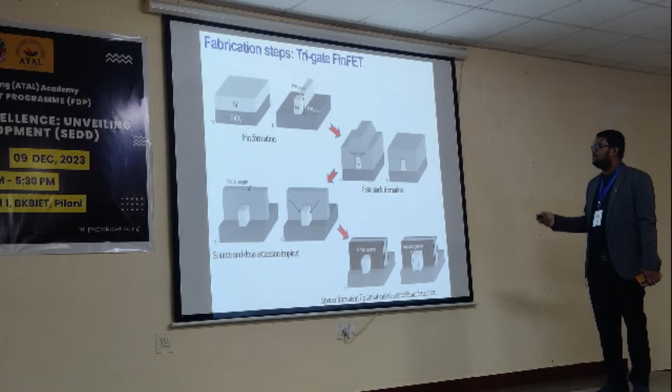There are lots of different techniques or methods, because our commercial photolithography technique can reach up to 200 nanometer resolution range. But if one needs to reach a finger thickness of 11 nanometer, as seen here, this is not achievable by normal photolithography. So some different technique was used, and the detailed techniques are also reported. So finger thickness can be reduced to the 10, 11 nanometer region. Then after creation of this finger, it can be processed through thermal oxidation to create a high quality oxide layer over this region.

Okay, and then the gate material is deposited. Gate material means some metal or polysilicon, polycrystalline silicon, can be deposited, and then some planar method is used to remove that additional material because this portion must be extended, since here is the fin. Any deposition technique will show a non-uniform surface.

Now here is the removal of additional oxide and additional gate material. So this portion will be removed. Some gate material is removed from this portion, this portion, this portion and this portion. So the fin is again coming out from here and some fin is coming out from there.

So they are basically source and drain. You can consider this portion as source and another portion as drain, and only within this gate portion is the inner portion responsible for creating the channel. Gate control is only over this range, within this fin. The rest of the portion will be your source and the backside will be your drain.

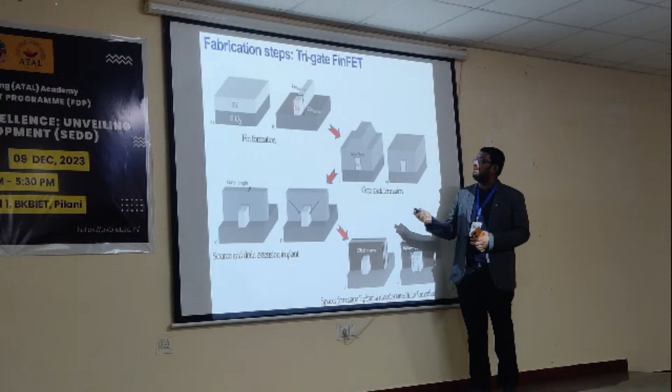So now some offset spacer is used because the source and drain will be extended. If the source and drain is too narrow, like 11 nanometer or 10 nanometer, it will show a very high series resistance, which is not expected. That's why this source and drain region is extended by epitaxial growth, so it can show a broader view.

So this is the typical FinFET fabrication technique. If you see the fabrication steps, they are much easier because fewer steps are used to fabricate this. That's why this device is now very much acceptable, but still the modeling part of FinFET is under consideration, and lots of different models have been proposed.

Lots of models are proposed by the University of Berkeley. You can see different research, but I can say FinFET still has some openings for research if you want to do some potential work in simulation mode. So FinFET and advanced devices can be considered for that.

Also there are extended discussions on whether FinFET really overcomes the short channel effects or not. Partially it can overcome them, but not fully. That can also be discussed later.

For the last half an hour, I'll move to a new topic, a different topic, that is advanced material-based field effect devices. This area is really my area, I am working in this area. So I'll just show you something here.

I can come here, the background of advanced material-based devices. In my whole discussion, what I have shown is basically we are moving towards finding a better device to eliminate the short channel effects. That is one way. Everything we have discussed is in silicon technology only, but silicon technology is not the only option.

We can move towards other advanced materials, because the recent time is the time of new materials. Lots of new materials are invented, mostly nanomaterials. Nanomaterials can be considered in 0-dimensional, 1-dimensional, 2-dimensional forms. So there is lots of opportunity to work with field effect transistors or field effect devices, where new advanced materials can be considered as the channel materials.

We are focusing on 2D materials in our research mainly, but among these 2D materials, there is another important material which was considered for fabricating field effect devices, called CNT. Carbon nanotube FET became very popular for developing field effect devices. We also developed a back-gated CNT FET in our lab.

It works, really, but it's not a new material, because CNT has a large background. It has already been discussed in multiple research articles, and their properties, limitations and advantages are all discussed. We are now moving towards advanced materials where our main focus is, and we have started working with 2D field effect transistors using the material graphene.

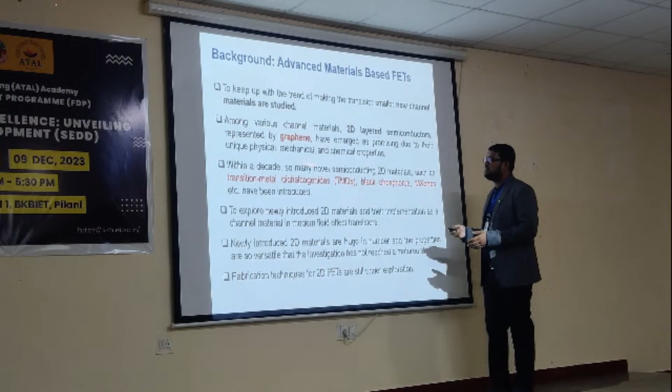Graphene was invented in 2004 and matured in 2010 and 2011, and over the last 10 years, lots of people have worked with graphene and graphene oxide. Almost the area is blocked, there is almost no chance to work, because lots of work has already been done on graphene.

So now people are moving towards new advanced 2D materials, which are in some ways better than graphene, but graphene is the first material which gave us the idea that 2D can really work. Actually, before the invention of graphene, two other carbon allotropes were invented: fullerene, the 0-dimensional carbon allotrope, and CNT, the 1-dimensional carbon allotrope. But theoretically, people thought there would also be some 2D materials in carbon form.

But when graphene was invented, that missing carbon allotrope was invented. It showed lots of beautiful properties, and that's why people moved towards finding more and more 2D materials. They found alternate 2D materials in chalcogenide form.

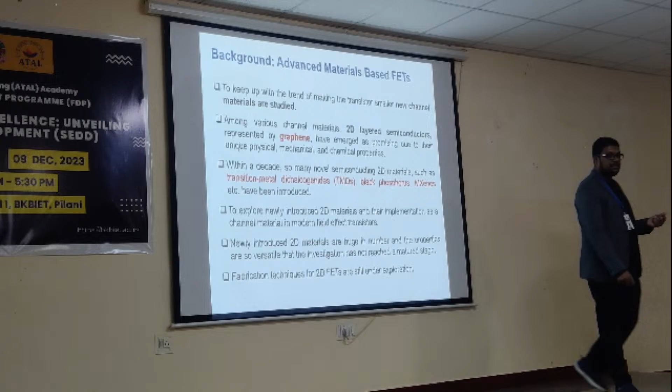The most popular example is MoS2, molybdenum disulfide. Okay, MoS2, WS2, MoSe2, WSe2, SnSe2, lots of chalcogenides. All these are 2D materials. They can be used for developing field effect devices. Not only for mainstream electronics, people can use them for multiple other applications.

Other than these chalcogenides, black phosphorus is one of the most popular 2D materials, but this material is quite unstable. If you keep this black phosphorus in open atmosphere, it would be oxidized, and after some time it would be damaged. But the property is very good.

We prepared this black phosphorus, but after a few seconds it shows some different color, and after a few days that work completely stops. So black phosphorus is an unstable material, but it's really a very good 2D material.

MXenes are basically metal carbides. That is one of the very advanced materials. We also fabricated MXenes in our lab. That is a good material, but again, the issue is there.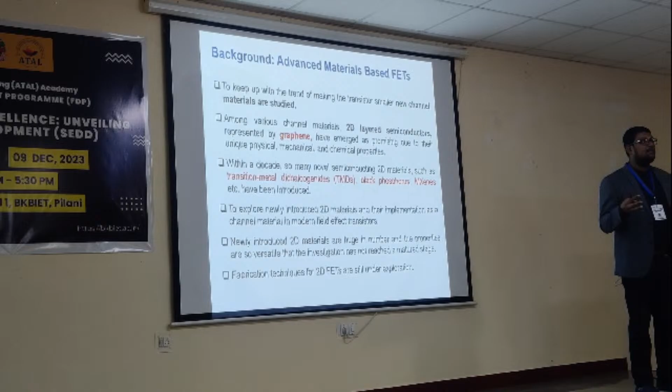When you are moving towards more and more nanomaterials, there will be some stability issues, because in normal atmosphere they will be degraded. But it can show beautiful properties. So that is the challenge, to convert this advanced material to a good device-related material.

Materials are available in raw form, but they have to be converted for the good field effect device form. So how can we proceed for this type of research? There are two ways. When we work with advanced materials based field effect transistors, the simulation technique is not so similar to what we are doing now for silicon technology. If you have TCAD and Silvaco, you can work with any silicon technology, but when you are working with these new 2D materials or any other advanced materials, there are two procedures.

One is you can choose a density functional theory based tool, DFT simulation tools. There you can atomically design your material, any 2D material. Suppose you want to design it, there is some standard library that starts from graphene. You can modify, you can change, and you can implement your own material. Then you can simulate their properties.

When the properties are done, then you can choose NEGF, that is non-equilibrium Green's functions, one powerful conceptual simulation tool. So you can use these NEGF functions to study their transport properties. Now the new materials you have constructed, you have tested their properties.

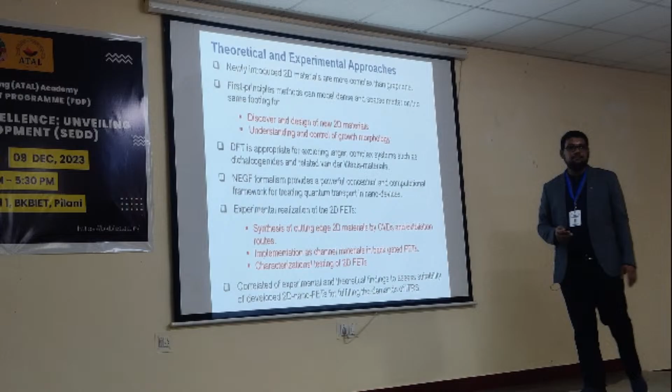So in that way, we would like to proceed on the theoretical and experimental approach towards new advanced materials based field effect transistors.

I'm not going to discuss this basic graphene FET. I'll show you one work from 2019. This is the basic graphene FET - I'll show you the device because it's the first 2D FET. Before that, I had no confidence that we'd be able to fabricate field effect transistors in our lab and measure them. But now we have lots of facilities, we are able to do it. In 2018-19 it was really challenging.

But first time we observed field effect transistors with graphene oxide material, used for chemical sensing applications, and this article was published in IEEE Transactions on Electron Devices.

If you can see, we are using graphene oxide material, not pure graphene. Graphene and graphene oxide have a difference. Graphene is the pure material, showing almost metallic behavior, but it has huge hydrophobic behavior. So if we try to make graphene soluble with water, that will not be possible because of the hydrophobicity.

But graphene oxide is nothing but graphene with lots of sp3 hybridizations - graphene has only sp2 hybridizations. Graphene oxide has sp3 hybridizations, meaning lots of oxygen functionalized groups exist - O minus, OH minus, COO. This makes graphene oxide soluble with water.

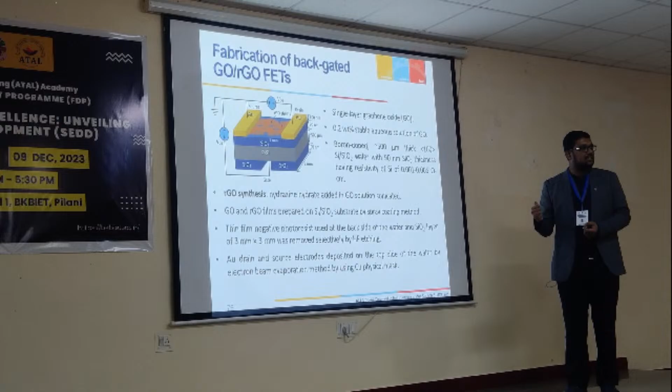So simply the deposition was possible only due to the solubility of graphene oxide with water. We drop casted it in a controlled way over the Si/SiO2 substrate, then removed some oxygen functionalized group. Here you can see the structure we fabricated - it's typically a backgate structure device. Without front gate, that device can work as a field effect device.

Still you can see the MOS structure here - this is your p-type silicon substrate, this is the substrate, and this is the silicon dioxide. We purchased this substrate directly from the market, from known vendors, and asked them to control the oxide thickness - sometimes 90 nanometer, sometimes 300 nanometer. Now we have etched this portion from the back side using hydrofluoric acid, and this portion has been opened.

Now on the top side, we have deposited reduced graphene oxide - these are in flakes form. Graphene oxide is not a continuous layer, it's flakes - I'll show you the FESEM image. We deposit it by the drop casting method. It's not continuous, but there is connectivity from the source and drain terminal.

After depositing this film, we use a shadow mask to deposit the gold drain and source electrodes - this is the drain and this is source. Depending on the bias, one can choose which is source and which is drain. So this is only a 3-terminal device, we don't have a 4th terminal - because we don't have a top gate. We have source, drain, and gate terminal. This is the VDS voltage, source is connected to ground, this is the VGS voltage. Now what is the MOS junction here? Here the metal is this one.

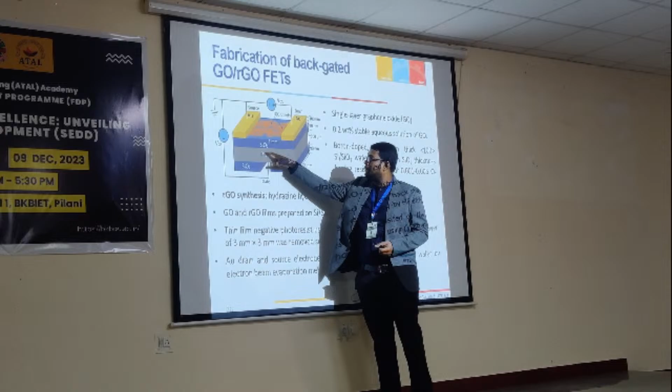Compare this one is the metal, they are doped silicon. Oxide is oxide here, silicon dioxide, and silicon where the channel was formed - here this is the channel with different material. Graphene is the material used here as a channel. So this is our MOS structure, this is our capacitor. Now this source terminal is connected to this channel region.

If we can apply some voltage between this source and gate, this capacitive structure will inject some electrons in this channel region. How? If I can apply this positive voltage here, so it will try to induce some negative charges within this channel region through this source terminal. So this is the behavior of a normal capacitor, and that is happening here.

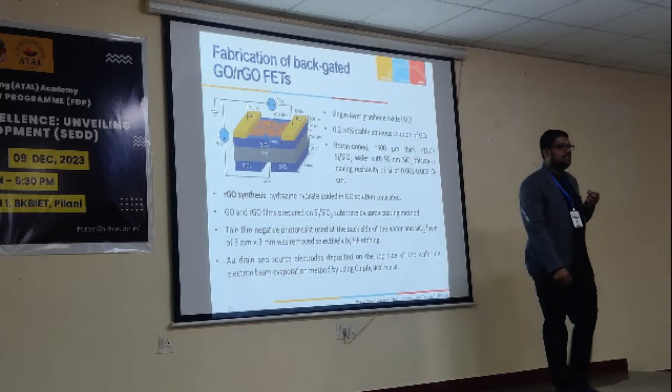So initially this graphene oxide shows the p-type behavior, p-type semiconductor. Why is this p-type semiconductor? 2D materials have very low carrier concentrations. Carrier concentrations are normally considered in per centimeter square form. Normally in silicon, moderate doping is 10 to the power 16 per centimeter cube. But here we represent this in the order of 10 to the power 12 per centimeter square per unit area, because charges are available in 2D form, a 2D sheet. They are very limited in number.

Now you have the graphene substrate, graphene material initially. Now that is oxidized slightly, that's why graphene oxide is formed. When different oxygen species are adsorbed to the surface, they capture few free electrons over the graphene area. So when the electrons are captured, then ultimately we can say the holes are increased. Electrons are captured by this oxygen species, so holes are increased, and when the hole is increased, initially this graphene oxide tries to show p-type conductivity. Normally after fabrication, the graphene can show p-type conductivity.

Now what happened we are doing here? We are applying the gate voltage here continuously, so we are injecting some electrons within this channel, so the hole concentration will be neutralized, and after some time the hole and electron concentration will be exactly equal. When that happens, the device will show minimum conductivity and will be considered off. Further increase of VGS voltage, electron concentration will increase, and it will show a continuous increment of the current. I will show the behavior, but with this biasing arrangement I have shown the actual scenario.

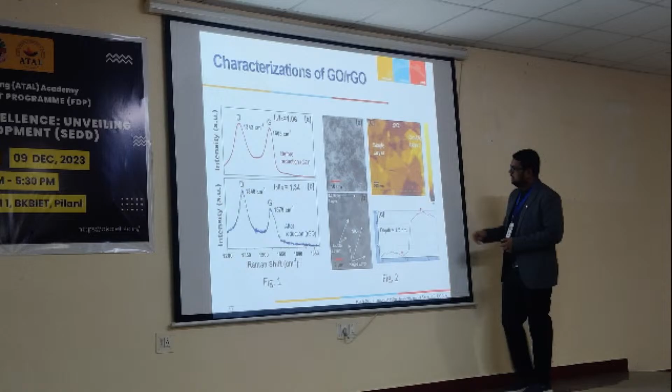This is called atomic force microscopy - this is the scanning electron micrograph, and this is the atomic force microscopy. We can see this is the portion. Suppose here the atomic force microscopy tip is moving from here to here, and due to this tip transition, we have measured the depth as 1.5 nanometer. Graphene is a one atomic layer thin layer, showing 1.5 nanometer - this is due to the oxygen functionalized group at the top and bottom. That's why this thickness is slightly more than the one atomic layer.

So this is the Raman spectroscopy. Raman spectroscopy is the most important spectroscopic technique which can characterize whether graphene is really formed or not. This DG peak - D is the defect peak and G is the graphene peak. So this DG peak actually represents that graphene is formed, and depending on the ratio we can predict if this is graphene oxide or reduced graphene oxide.

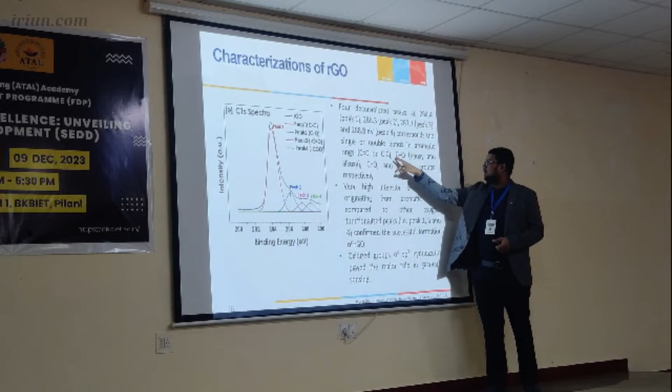Here is the XPS image, X-ray photoelectron spectroscopy, that can show which type of bonding exists. So this major peak indicates the CC bonding, carbon-carbon sp2 hybridization, and this CO, C double bond O, COOH - all these existences are indicated by these different peaks. So in that way we can characterize the material first. When we choose any material, we have to characterize it exactly to know the detail of that.

Then this is the behavior of the current voltage characteristic. So this is ID versus VGS characteristics. We have measured it with a constant VDS of 1.4 millivolt, and our ambient was synthetic air, argon and oxygen. Why was this ambient different? Because actually our application is a gas sensing or chemical sensing application.

So ultimately we want to use our device for different types of applications. Here I am showing everything from the mainstream electronics perspective, but this experiment was done to perform some chemical sensing applications. So we have considered different ambient temperatures: 25 degrees, 75 degrees, and 125 degrees centigrade.

Interesting thing I want to show you: VGS voltage is started from 0, and this is your drain current. When the gate voltage is increased, the current decreases because initially it was p-type, and holes were the majority carriers. Now when gate voltage is increased in this capacitive structure, electrons are injected continuously. Electrons injected means electron-hole recombine and the effective carrier concentration decreases.

This is the point called the Dirac point, where the electron and hole concentration is almost equal, and that is the threshold voltage for this device. When electron and hole concentration is equal, it shows the minimum conductance, so current is minimum here.

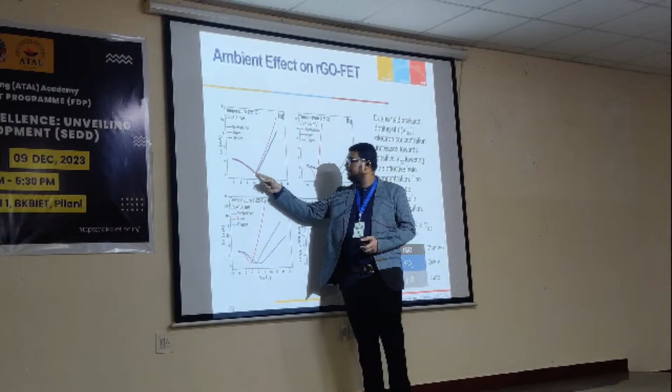At the starting point we can consider from the negative, or we can start from 0, but the threshold voltage is basically the Dirac point. That particular gate voltage where the current is minimum is called the Dirac point voltage, so that is the threshold voltage for this device. On-off ratio can be measured from the on condition, which is normal condition, and the off condition, that is the Dirac point.

On current and off current ratio: this device is normally on, a depletion mode device, but the quality of this off is actually important to choose this device for mainstream applications. Graphene FETs have limitations because on-off ratio is not so good, and this off, at the Dirac point, sometimes may not show such a low current value.

However, this work was extended for a different purpose. Ultimately this device shows some different types of amplification techniques. We actually detected methanol, a volatile organic compound, by using these sensors with this RGO FET, and it shows a beautiful sensitivity amplification under the application of particular gate voltage.

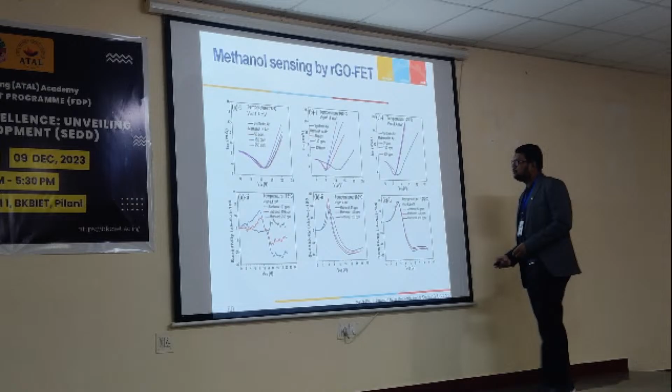Gate voltage near 5 volts is showing the highest sensitivity, and also near 12 or 13 volts it also showed the highest sensitivity. So it was considered for some different applications, showing an amplified response, but that is not relevant to our discussion.

These are few numerical values. This is the exact mechanism of why this type of sensitivity amplification is showing, but again I will not discuss it because this is not relevant to that.

Okay, sorry, I have not shown that. Probably I have removed that conclusion part. Okay, no problem.

I can conclude verbally. So that whole thing indicates the flow, the evolution of the field effect devices. I think now it's clear why I am saying this is a field effect device, not exactly a MOSFET. MOSFET should be too narrow actually; it's a wide variety of different types of devices, but still that MOS structure will never be changed.

That is the main heart of this device. So if you have any new material based device, you can choose it, but that field effect structure will remain the same. This is the tradition, and my intention of this presentation is to explore that different possibility of work, exactly what we are studying in our book, then slowly the new inventions which were invented in 1980, 1990, those advanced devices are now in mature stage.

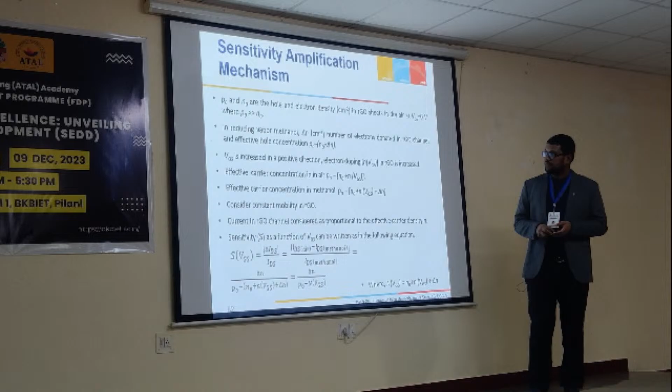And what are the possibilities we can do in recent days? If we want to stick with our silicon technology, then also fine, we can do some multi-gate related research. But if we want to move towards some new material based research, then we have to follow the new technique we are discussing. If we want to choose materials other than silicon, we have to change our simulation techniques, choose new methods. Of course, density functional theory has to be chosen for exploring new materials in simulation mode.

Otherwise, one can move towards the fabrication route. They can fabricate the materials and device, they can test, but of course that is a very costly thing.

One lab we are developing recently is the complete fab lab in our new workshop building, under the PARTS DST project. Under this project we are developing a complete fab facility. We are quite optimistic that we will be able to fabricate high-end devices comparable to those reported in other labs.

This is completely for research purposes. So if you are interested, you are welcome, but I think it will take one or two months to be completely delivered in conditions.

Other than that, we have another project, the DFT NEGF Explorer. We will try to increase the number of users so one can use it.

Other than that, we have our small existing lab, because I have completed multiple projects from SERB, MHRD, DST, and some internal grants, DBT, Department of Biotechnology. This is our small lab, the picture was taken in 2019-20, but now lots of other facilities have been added.

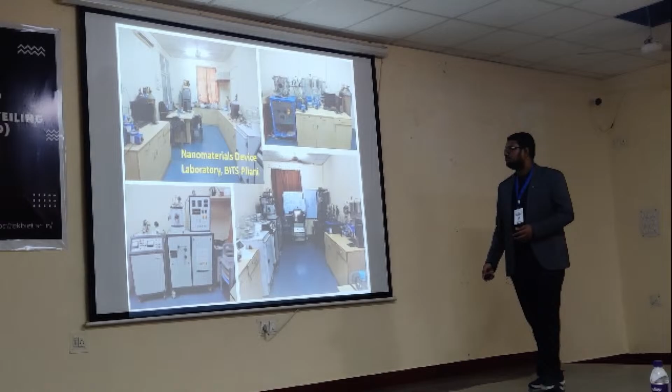I think our bigger lab will be delivered shortly. If you are interested, you are welcome to come to our lab, and if you want, you can extend some research. Thank you so much.

One question is from my side, sir. So you are saying that there is a characteristic between ID and VGS.

Yes sir, so it means it is a characteristic between IDS and VGS, and you are saying that at the dip, the number of holes and number of electrons are same. So but drain current is flowing, so is it due to holes or is it due to electrons?

Yeah, that's a good question. They're almost equal. Yes sir, it is very difficult to make it exactly the same. If you can increase the resolution more and more, you will see another point, another point. Ultimately it will not be exactly zero, exactly equal, there's a transition.

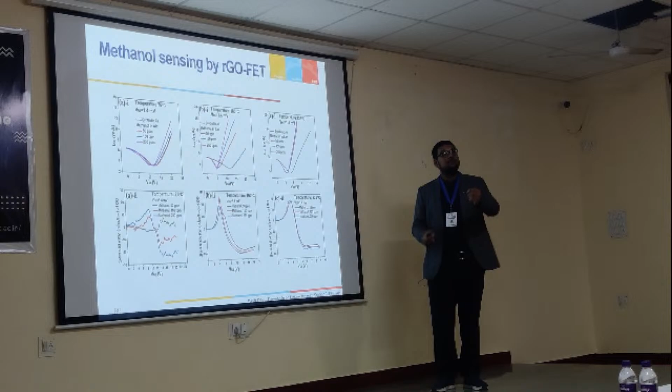So if you can see, suppose 10 volts, now we are looking at this graph and saying the Dirac point is at 10 volts. The actual Dirac point, if you see, is 10.52 volts. If you check it properly, there's a lot to it. So exactly zero is not possible, exactly zero will be for a fraction of time, otherwise there will be some imbalance. So if you see, that situation is looking like this - good question.

How the current is flowing - I can show you that the current is flowing due to the hole current as well as the electron current. So there is current due to hole flow and electron flow, but the current will be in the same direction. But the holes and electrons recombine with each other, so their effective numbers are reduced, that's why the effective current is reduced. But it's not that there is no electron and hole existing for movement.

And another answer to this - electron and hole do not have the same mobility. Mobilities are different. If their mobility is dissimilar, even if you think this is exactly at the middle, still hole current will be lesser than the electron current. That is another solution, we have multiple answers. Any question?